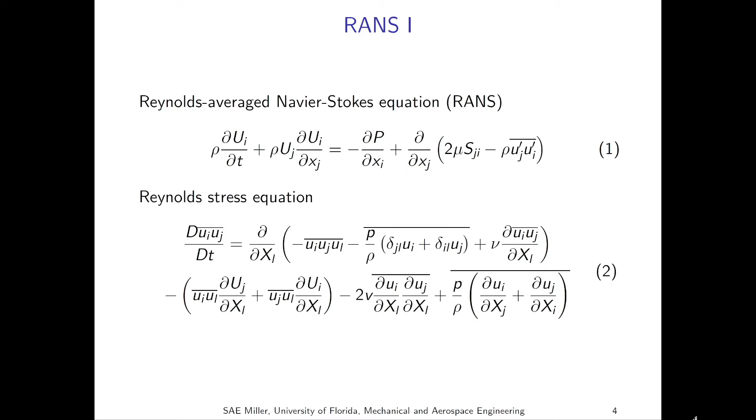The new approach of LES and Ffowcs Williams-Hawkings has some downsides in that we're really learning nothing about the acoustic sources, but we're making some accurate predictions. It also has a huge computational cost relative to RANS. Here's the typical RANS models which we work with. We have, of course, momentum, Reynolds stress equation, dissipation equation, and TKE.

And we might also ask, from an aeroacoustics perspective or a user of CFD, what is the output of the codes? Well, we know the geometry. We have the computational grid where we store variables. We have the mean variables like U bar, V bar, P bar, etc. And we usually have two equation models. One equation models aren't useful for acoustics because you can't estimate length and time scales typically. So we usually want two equation or higher models from RANS in practical acoustic predictions.

And you usually get K or omega or epsilon. And even better, you might use a Reynolds stress model and connect the Reynolds stresses to the stresses derived from an acoustics model. So you get the Reynolds stresses and epsilon or omega. So that's what we have to work with, and we're usually just given that from an industrial CFD database to find acoustics.

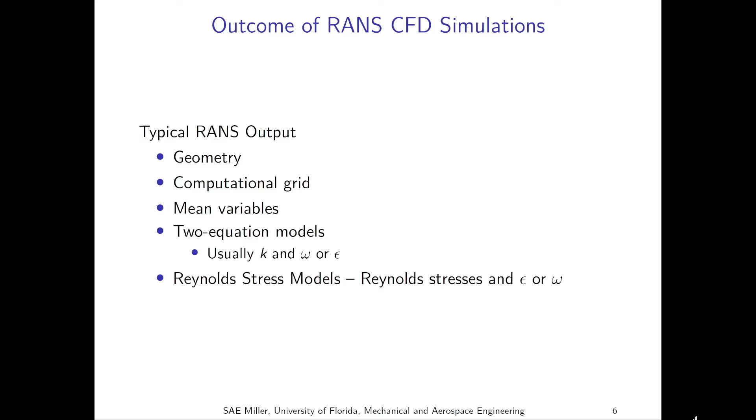The traditional path of acoustic analysis and acoustic predictions was found by Sir James Lighthill, and he did nothing but take the compressible Navier-Stokes equations and rearrange the left-hand side into a wave operator and put everything else on the right. And that's shown in equation 5. And he would solve this equation with a Green's function, and the inhomogeneous source is Tij, the Lighthill stress tensor, which is shown in equation 6. And so it's really an integral equation that convolves the source with the vector Green's function.

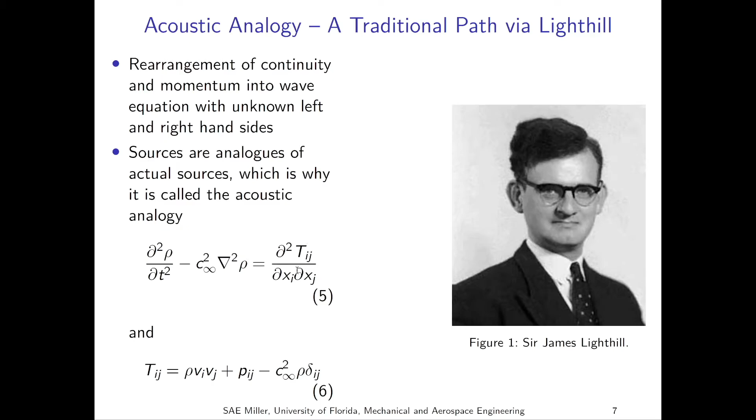And modern approaches that predict noise are based on this approach too, unless you go down the path of Ffowcs Williams-Hawkings. But of course, Ffowcs Williams-Hawkings is also an acoustic analogy. Now, typically, when you model the double divergence of the Lighthill stress tensor for spectral density, you get a two-point cross correlation of this term on the right-hand side of 5. When you do that, you have to create models for the two-point cross correlation because you don't know what they are, since you only have steady RANS simulations. And so you're assuming forms of two-point cross correlations based on the RANS output.

And we would estimate time, length and velocity scales from that approach. Here we have a length scale, a time scale, and a velocity scale of turbulence. And they could be frequency dependent, if you wish, and become very complicated. And that's what a lot of people's research has become these days, how to estimate these from the RANS variables better. So this is the real connection.

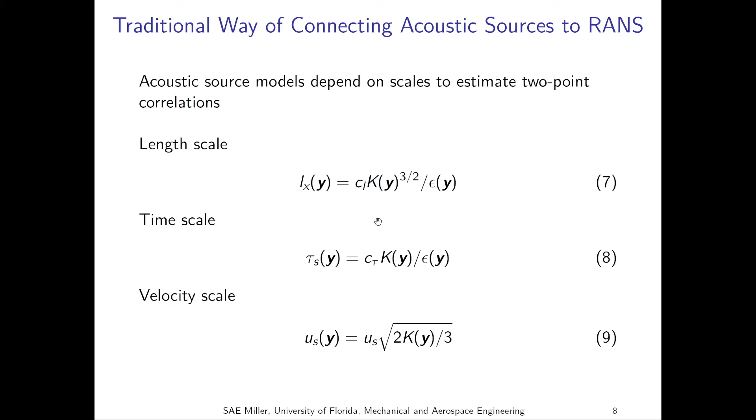And the simplest one to make, you have 3 constant coefficients, CL, C tau, and US, and you just basically do a dimensional scaling of turbulent kinetic energy and dissipation to get a length scale, etc. And then you have models for two-point cross correlations. Here's the model for the two-point cross correlation.

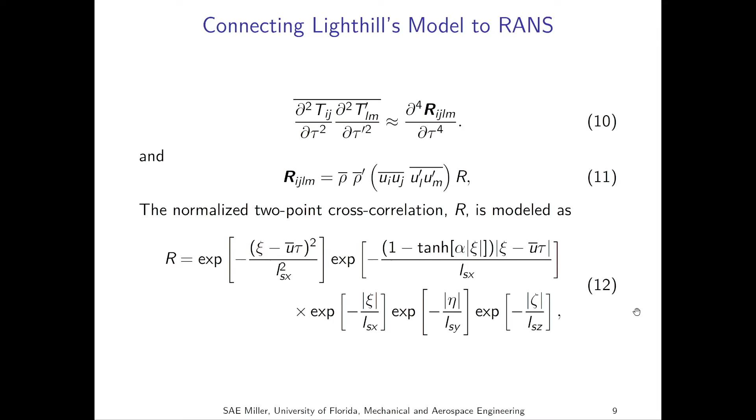So you can see the normalized two-point cross correlation model R. We have a normalized model for it with a magnitude that is just an approximation to connect it to RANS. And all this is just a typical two-point cross correlation normalized model involving, say, 2 points from one particular point in the CFD. And this is actually a published model from AIAA Journal in Chris Tam's work. It connects the length, time, and velocity scales from a RANS simulation to the CFD model.

There are more contemporary acoustic prediction models like in equation 13. Here's one I created. This is more general than Lighthill's approach and it's published in AIAA Journal. You have the acoustic pressure at position x and time t is nothing but an integration of the Green's function over acoustic sources theta n. And here it is in the spectral approach. So you have x and omega instead of t.

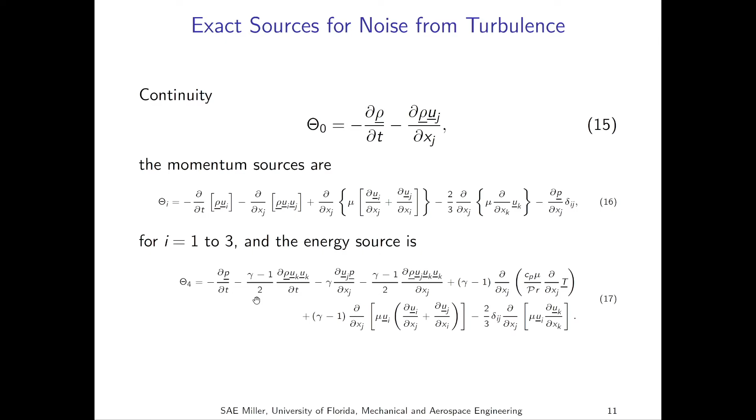Here's the sources. The sources are nothing but the continuity equation, momentum equation, and energy equation, theta 0, 1, 2, 3, and 4, respectively. So if we know those from, say, LES, we can do a direct prediction with no assumptions. If we have RANS, we still have to connect these two-point correlations somehow with the outgoing predictions.

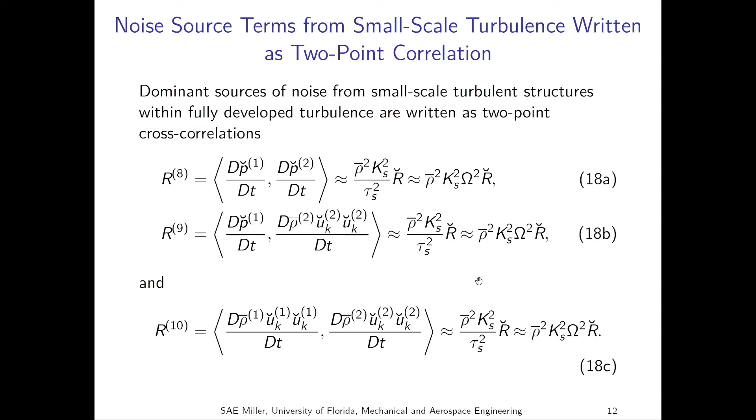For fine scale or small scale turbulence, we know what the sources are. And the sources are, say, the material derivatives of pressures, pressures with rho UK UK, and, say, rho UK UK with rho UK UK. We can approximate these and connect them to RANS like we did with the traditional approaches of Lighthill. We also have a time domain source for shockwave shear layer interaction like in a jet flow, an off-design jet, and you can also write that in the spectral domain to go in the spectral model.

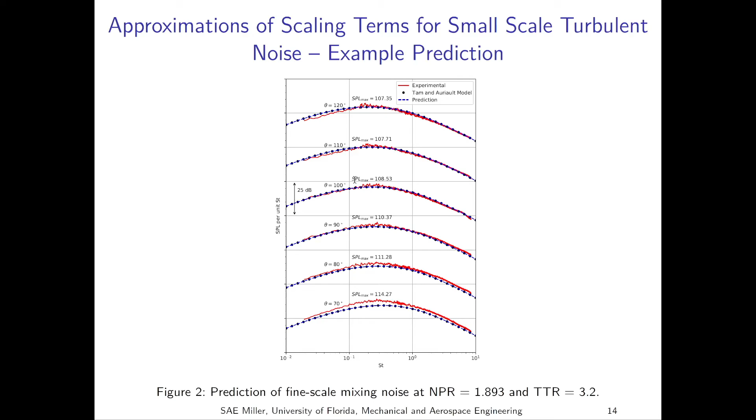Here's one example of these types of predictions. The red lines are experiments. The y-axis represents sound pressure level. X-axis is non-dimensional frequency. This is from different angles radiating from a transonic heated jet at a nozzle pressure ratio 1.9 and total temperature ratio about 3.2. You can see the predictions of the present model match the experiment really well. And this is from a steady RANS simulation connected to this contemporary acoustic prediction approach.

A more advanced approach might connect the model to wave number spectra of each of the field variables like velocity, density, pressure, and temperature. If we could have a RANS type model that could predict these instead of finding these from LES, we could do a better prediction. Is it possible to create a RANS model that predicts wave number spectra of the field variables? If we did, then the whole problem would be much simpler.

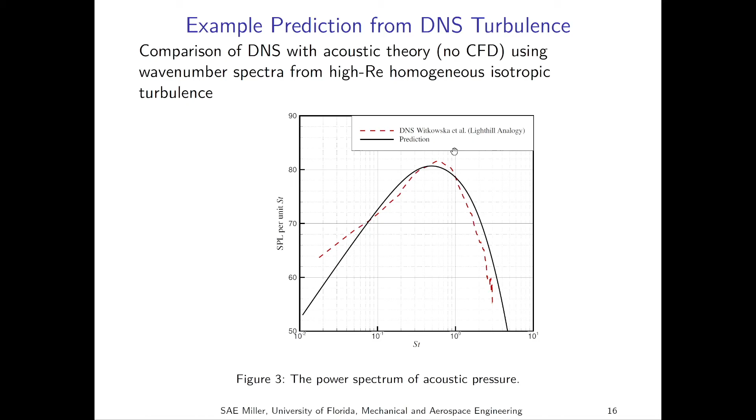There's also just purely using wave number spectra from turbulence theory to fill in the values shown in 21 through 24. Models for large-scale coherent turbulence are completely elusive in the aeroacoustics community, and therefore we use LES and Ffowcs Williams and Hawkings to make predictions. It's really up to the aeroacousticians to try and close the loop here.

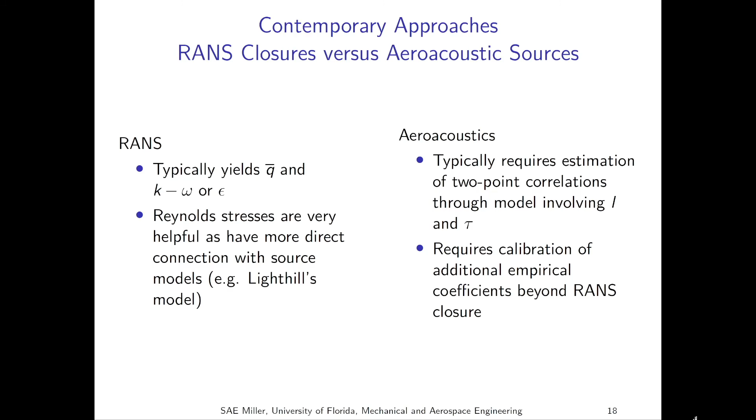Let's look at some contemporary issues between RANS closures and aeroacoustic sources. Typically, RANS gives us Q bar, the field variables, and K omega or epsilon. And Reynolds stress is, of course, being connected to source models, which gives us better predictions. In aeroacoustics, we usually need a two-point cross correlation, as I showed, and different length scales like L and tau, which are estimated from RANS. And then we have to calibrate the empirical coefficients.

Ideally in RANS, we would like to get direct wave number spectra of every field variable, or even better, some kind of idea what the two-point cross correlations are. It would also be wonderful to try and form RANS closures that yield results that are more directly applicable to the aeroacoustics community. In aeroacoustics, we need to formulate models that are more compatible with RANS to reduce empiricism.

Most importantly, in the aeroacoustics community, we need to create models for large-scale structures that are dependent on turbulence statistics and mean flows. Otherwise, we'll never be able to create good predictions of noise from large-scale structure turbulence using RANS solutions.